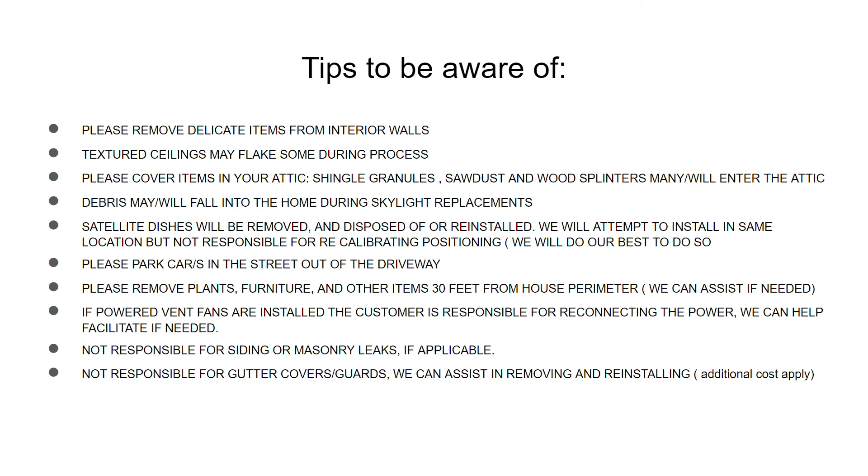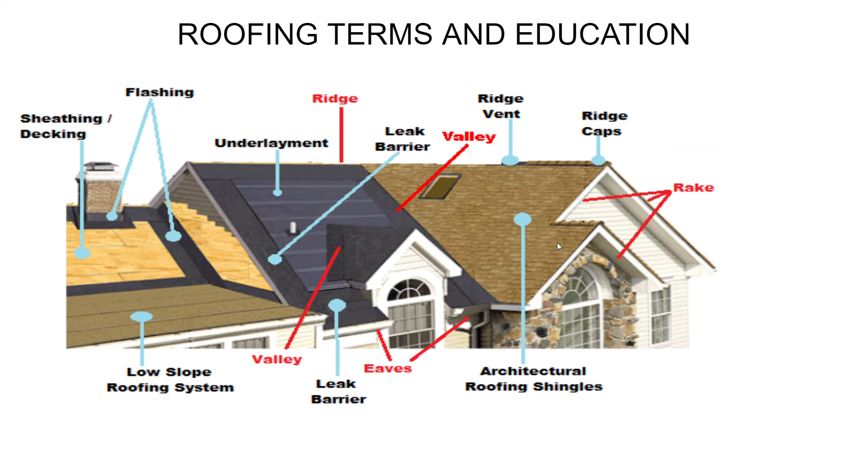We only use architectural shingles now. 3-tab shingles are extinct.

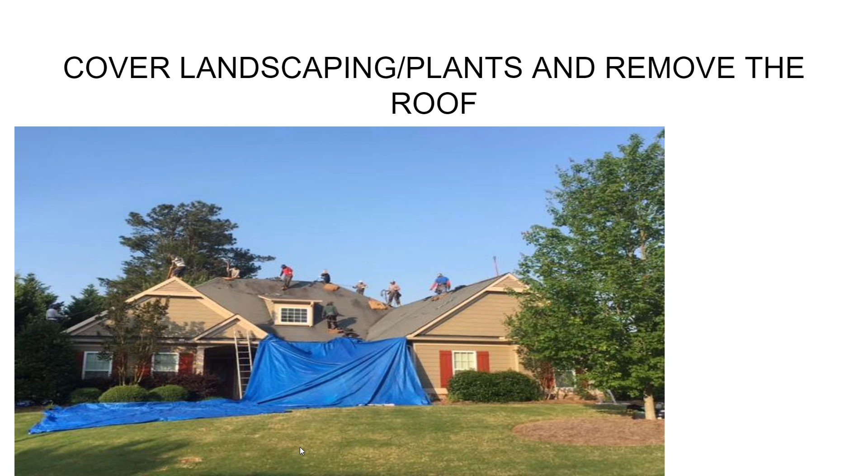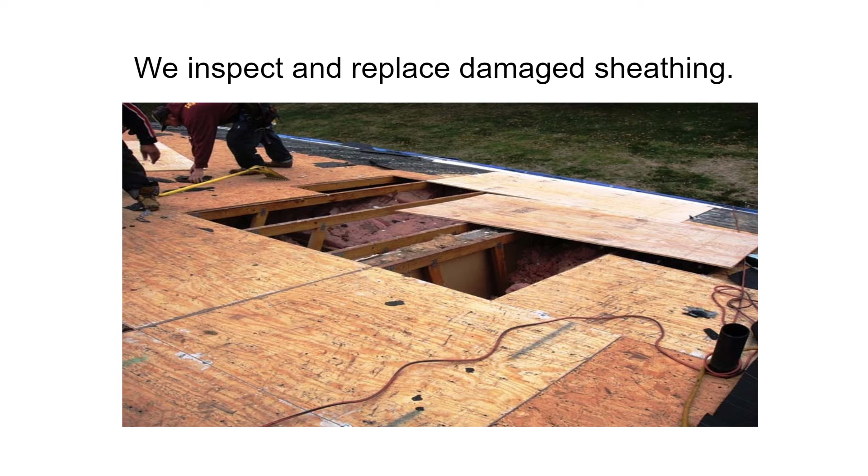I am on site and on the roof during the day of production to check for any damaged plywood. At that point, we replace it on a piece by piece basis, and ensure that the ice and water shield is put down, as well as the flashings.

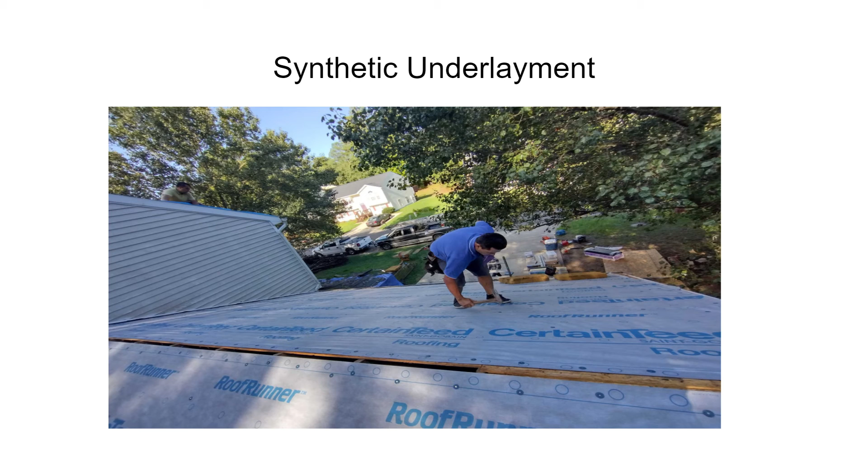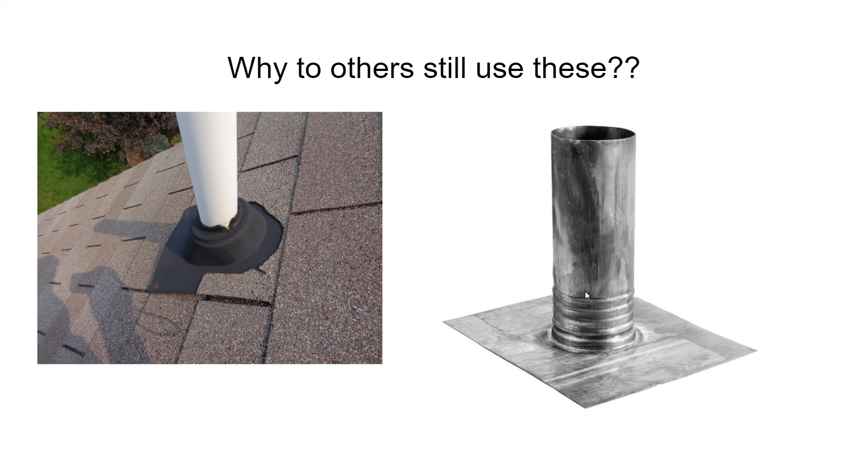I'm not real sure why people still use these. These are the rubber roof boots that are on 99% of every home in America, but here's the number 1 leak point - when the boot splits and breaks. So what we use instead is a galvanized, lead-based metal boot, and this is what it looks like. It actually sleeves over the pipe, so there's nowhere for the flashing to fail.

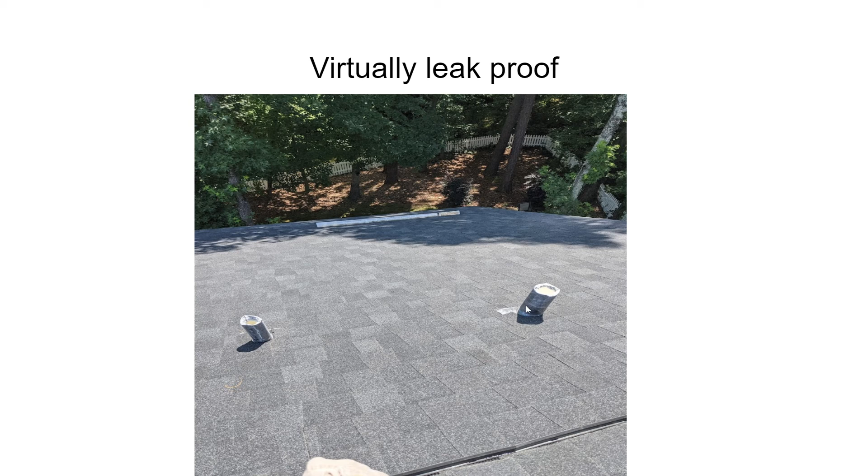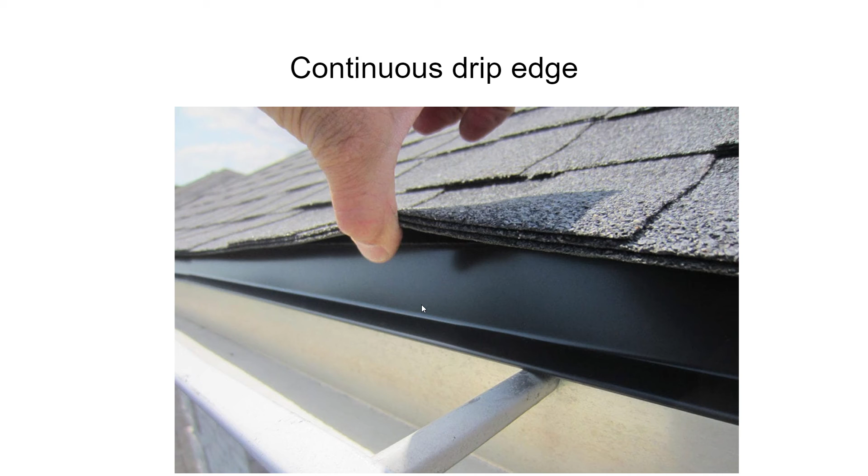If you have a chimney, we will replace the flashing if necessary and applicable, and then counterflash it using a grinder. So you install this flashing first, then cut with a grinder, if the mortar will take it if it's in good enough condition. We cut the mortar and then slide the flashing into the mortar pocket to give it a double flashing at the chimneys.

You clean up at the end. We use road tire trailers to protect the driveway. Thanks for tuning in.